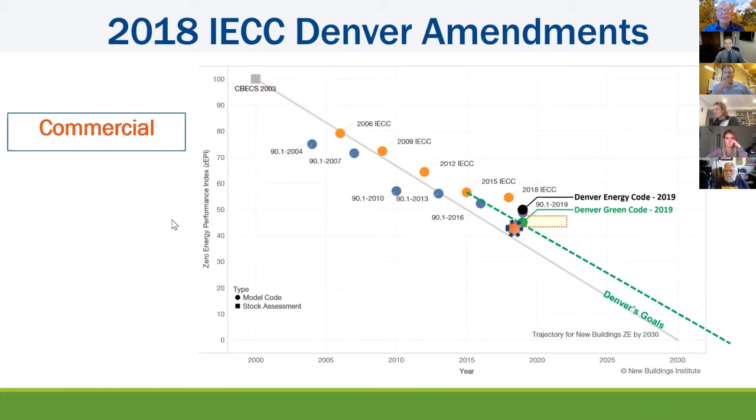That's really exciting. Here's a quick chart showing how Denver, as an example, is using the building code to drive improvement in carbon reductions. This green dashed line is the important one—it shows that following Denver's building codes will result in the building sector having zero emissions by 2035. That's actually pretty ambitious. Some people would like to see it happen even faster, but the reality is that getting to zero by 2035 is a pretty aggressive challenge for architects and building designers, and we're excited to embrace it.

In addition to the AIA, you've probably heard of other organizations involved in building decarbonization. The U.S. Green Building Council and their LEED program is one especially well-known example. As architects, we're happy to deal with these and embrace many even more stringent standards out there. We'll be showing you a few buildings that deal with those.

I wanted to share one example of a project underway in our office right now—a bond-funded project down in the San Luis Valley at the Sierra Grande School District. I wanted to share it because it's our first large building, 90,000 square feet, that is 100% electric. There's no natural gas in this building—not in the science labs, not even in the cooking kitchen. We wanted to show it's very possible to electrify not just residential buildings, but large institutional buildings as well.

There's one other organization I wanted to tell you about today, called Architecture 2030. It's parallel to the AIA and has adopted a standard of lowering carbon emissions of new buildings by another 10% every half decade. We've been working with this program for 15 years, and we've already reached the goal of reducing carbon emissions from our new buildings by 80%, which is pretty aggressive. In 2025 we need to move that to 90%, and as this graphic shows, by 2030—our target year as a profession—we hope to be carbon neutral with all new buildings.

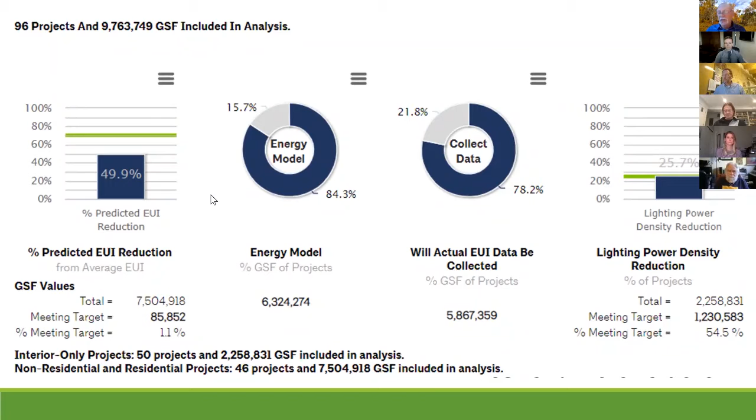Many of us member firms in the AIA rigorously track and report the results of all our buildings relative to the standard. I want to highlight this block chart on the far left of your screen: that 49.9% represents our total building portfolio last year, in 2019, so you can see we'd made pretty good progress. The goal last year was 70%, so we were just a nose under 50%. Every year we track and record this data and measure our progress, as do hundreds of other member AIA firms—because if you don't measure something, how are you going to make progress?

In addition to measuring what happens with the design of our buildings, at Cuningham Group we're very serious about walking the talk with our own operations. So we rigorously track in all of our 6 US offices and 2 overseas offices the carbon emissions and basically calculate our own corporate carbon footprint.

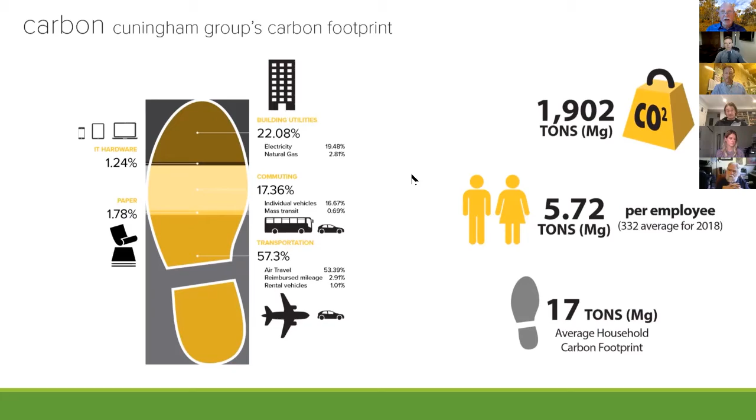This is a graphic that illustrates that footprint for you. The big takeaway is that right now, per employee per year, we're right around 5.7 tons of total greenhouse gas emissions. Now that we know this, we have put in place a plan to offset 100% of those emissions by the year 2022. We're finding that more and more of our clients are very interested in knowing what we're doing about our carbon footprint.

So if we were live today and gathered together in person, I would ask you this as a quiz. I'd like you to tell me which of these 3 sectors in our economy, transportation, buildings, or industry, do you think is most responsible for greenhouse gas emissions? Which would it be? Since we're not live, I can't quite do the quiz, but usually I get people thinking either transportation or industry.

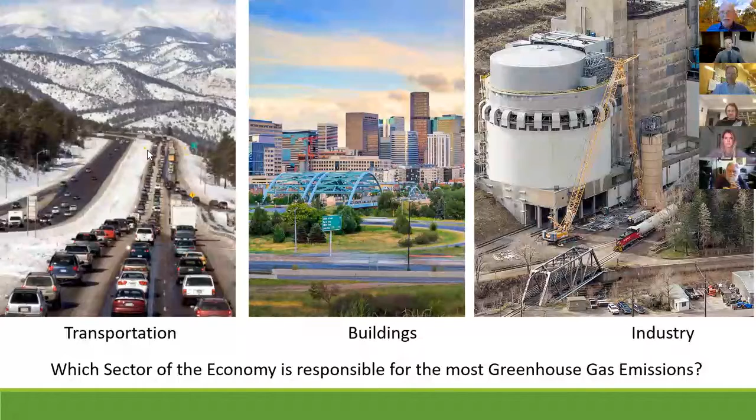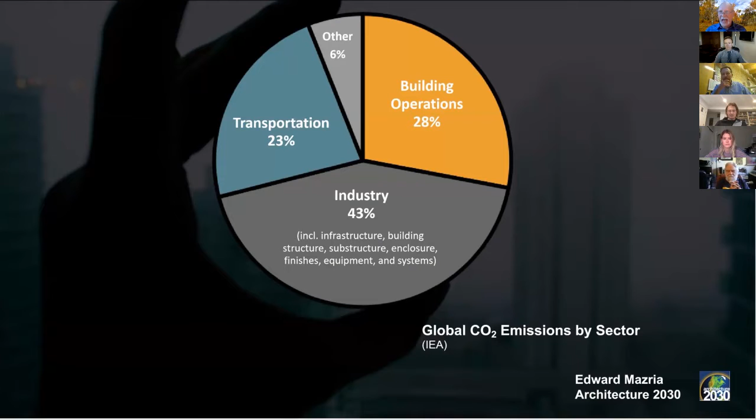And the answer is right here. The transportation and building operations are very close to one another. They're just about neck and neck, right around a quarter of that total pie. Industry is the single biggest chunk at nearly half. But there's one more piece of this that we need to understand and dig a little bit deeper. What we find when we take apart that big section of industry is that a very significant portion of it is actually all the materials that go into our buildings.

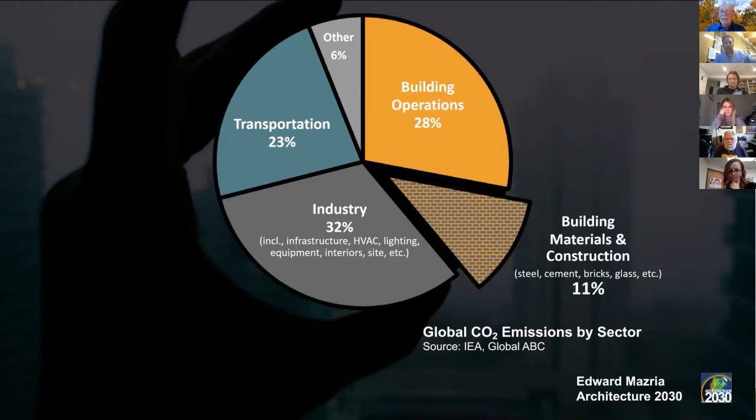So when we add all the greenhouse gas emissions from operating our buildings to the greenhouse gas emissions that are due to all the materials that we generate to create the built environment, we find that the combination of those is a full 39% of total global as well as US greenhouse gas emissions. So the big takeaway here is that buildings do make a very big difference. How we design and construct them is a very important piece of solving the carbon problem.

Existing building operations, though, remain a very significant problem because we have such an enormous building stock already in place. And we need to put in place better measures to start to tackle the problem of how do we more rapidly decarbonize the emissions coming from our large stock of existing buildings.

But if we think about that issue of those materials, there are some specific things that we can start to do better as a profession and as an economy and a society. The 3 big keys, and the first of those is simply to reuse, to use our resources more effectively. So where we have existing buildings, let's try and find ways to adaptively reuse them and find ways for them to continue into use longer into the future instead of simply demolishing things.

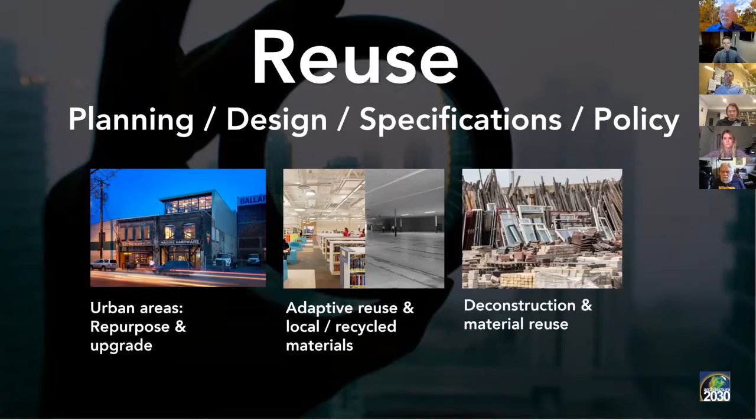We can also find ways to be more creative in how we utilize our urban areas and revitalize them. And finally, when it is time to take apart a building, instead of all that material going to landfill, let's try to use more of it again and repurpose it in future buildings.

The next piece is to reduce. As we're starting to design buildings now, we work with our structural engineers, for example. In fact, we have a structural engineer on this call, I noticed, Bob Redwine, welcome. So we're talking a lot right now about structure optimization. If we're enclosing a certain amount of square feet, how do we do that with less steel, with less concrete?

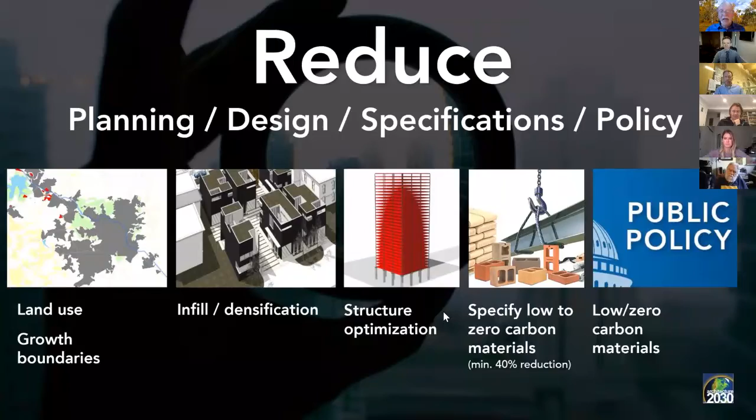Other things that we want to talk about are how do we specify materials that actually use less carbon to make them? And that's a very big push for many municipalities right now. And finally, how can we design buildings and environments that sequester carbon, that actively remove carbon from the environment?

Using more wood is one key answer to that. You'll see some projects that do that in just a little bit. We're also challenging our landscape designers to show us ways to design sites that start to sequester more carbon than they release.

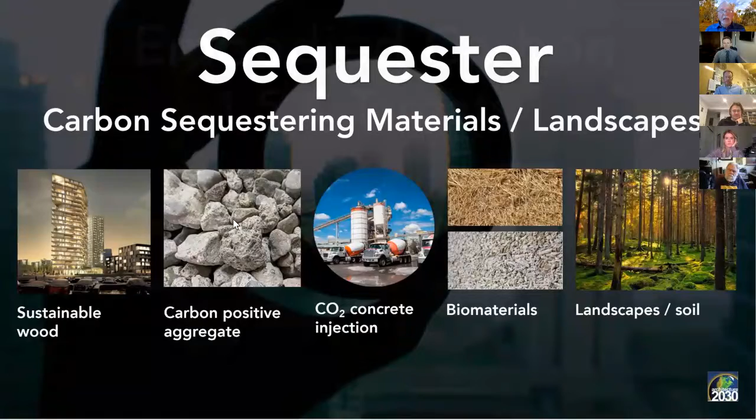And in fact, we have established targets, just as we had targets for reducing operational carbon in buildings. We now have targets. Right now, we're saying we think we can reduce the embodied carbon going into all these materials by 40%. And by the year 2040, that's our goal for when we will have zero emissions in the materials sector.

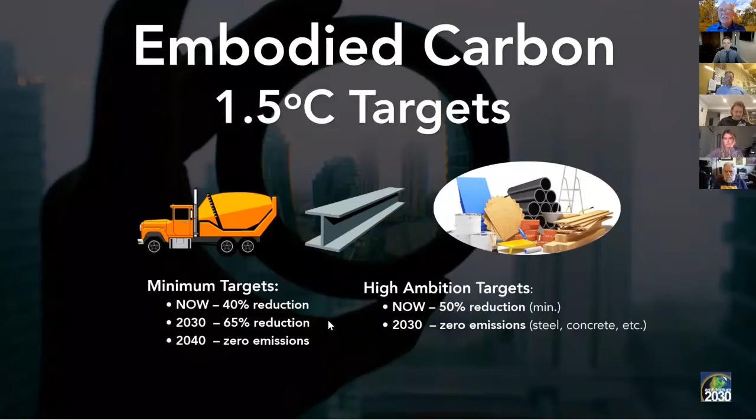I just wanted to share with you our excitement about a bill that came before the Senate just this year, and we believe it will come back again next year. That was a bill that proposed that all state-funded projects in the state of Colorado would establish criteria for understanding and limiting the amount of embodied carbon that could be used in the materials that go into those projects. And that applied specifically to cement, concrete, steel rebar, glass, and certain kinds of insulation. So we are very happy to be part of sponsoring that bill and testifying at the Senate, and look forward to more such collaborations with many of you in the next year or two.

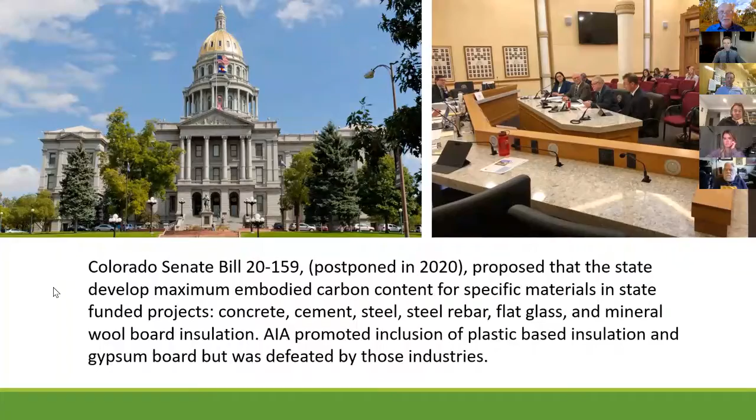With that, I'm going to turn it over, I believe, to Kevin. Is that right? Yep, you bet. Okay, thanks, stop Paul. It was nice to get through that without any of those very strange and rude interruptions, wasn't it? You took the harder part of it, Paul. Thank you, that was good of you.

So, Kevin, before you start, we're trying to get two of our legislator guests back in the room. Trying to make sure we can get Representative Bird and Kraft Tharp back in. I've got the waiting room enabled, so I just have to wait for them to reattempt. And while we pause for a second, I really apologize to everyone. That is the first time all year that I've been involved in such an effort to crash a Zoom meeting. It was everything they said it would be. It was, and then some, yeah. I'm glad I didn't have too many screen captures from that. This one's going to be fun to edit after the fact. Yeah, good luck with that.

All right, Jerry said they were locked out, but I thought I was able to get them back in. So, all right, I am going to allow people to unmute themselves, and then I will quickly clamp down if any of those previous attendees are still in the room. All right, people can unmute now. Great, I will point out, I think Kevin, you are duplicated on my screen, so it's possible that there could be another bug there. Oh, okay. Yeah, I'm presenting on one device and advancing on another one, so that's legit. Okay, yeah, thank you, appreciate that. This did happen to my kids at their first day of school, so now I feel very cool and hip, like I'm like them now, you know.

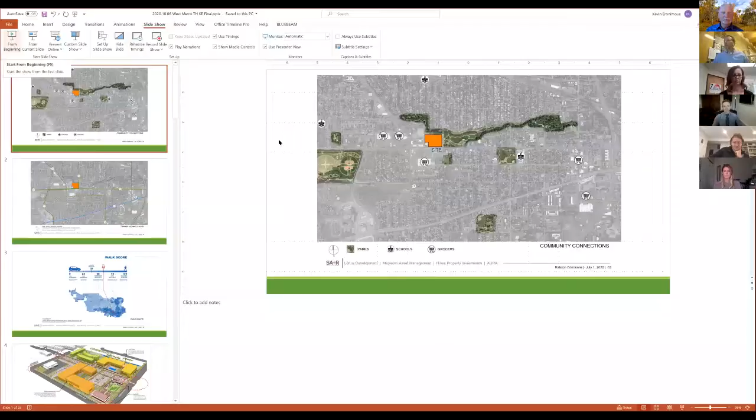Lucking, who's on the line from Fentress Architects, because I'm actually stunt doubling on her slides today. So the previous iterations of this presentation had a start with DIA, but we're going to start with something a little closer to home for this group, and piggyback a little bit on what Paul was talking about with some notions of both infrastructure and reuse and the carbon that goes into the built environment. So a lot of the work we all do is looking at new buildings and how they affect the built environment.

Looking at reuse of existing infrastructure and facilities is also a really important tool towards reducing carbon infrastructure. So we're going to look at a site at Ralston and Garrison today, flip through a few slides on this project and describe beyond the building aspect, what the community-wide aspect can do for not only carbon sequestration and reduction use in buildings, but also community connectivity and kind of health and well-being in that environment.

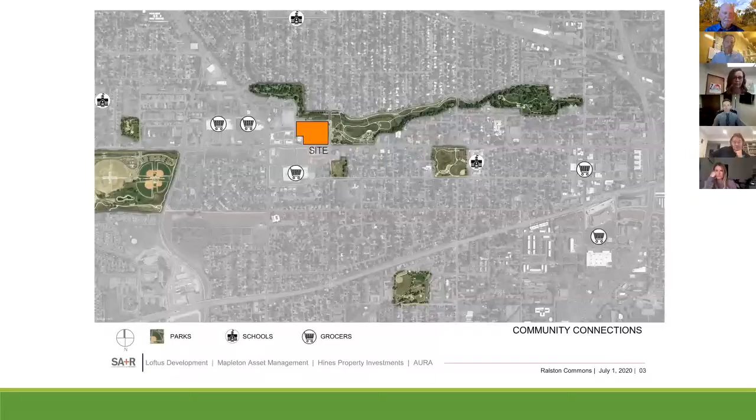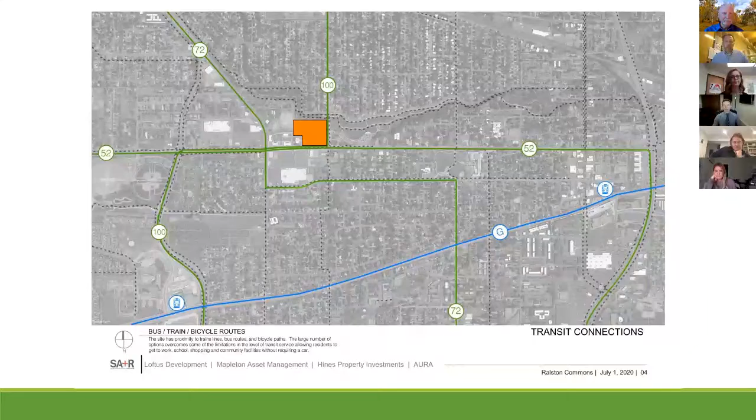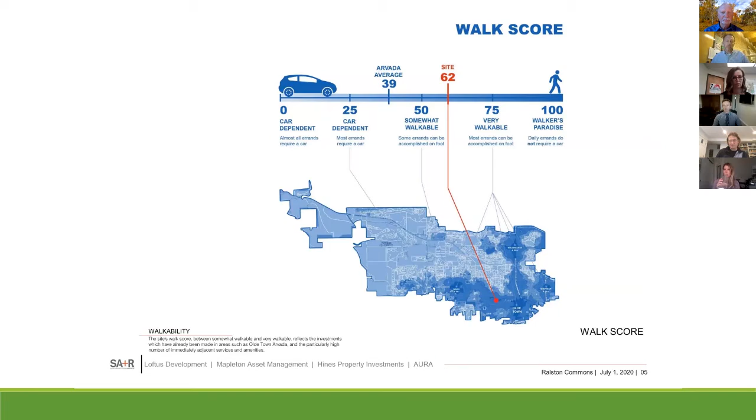Taking advantage of elements like that can improve a component called walk score - the ability to get around without relying on single occupant vehicles. This is its current walk score for the site, and I think what we're hoping is that through the master planning efforts of this site, that score improves.

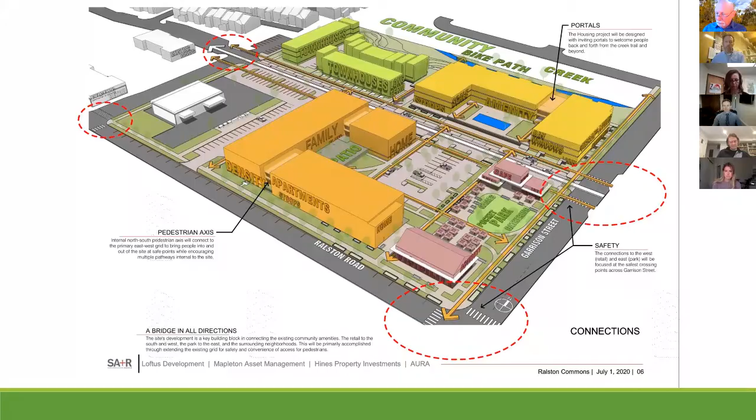This goes through and looks at connectivity, some different strategies for walkability. If you can't have good sidewalks, the connectivity from a park nearby, no matter how good it is, falls apart. So this project's early work has actually been going for nearly 17 years now, since the first efforts to look at this project and clean up the site.

We did a really unique town hall meeting recently outdoors in a park to respect social distancing, where we had about 20 easels set up and a video that kind of gives the history of this site.

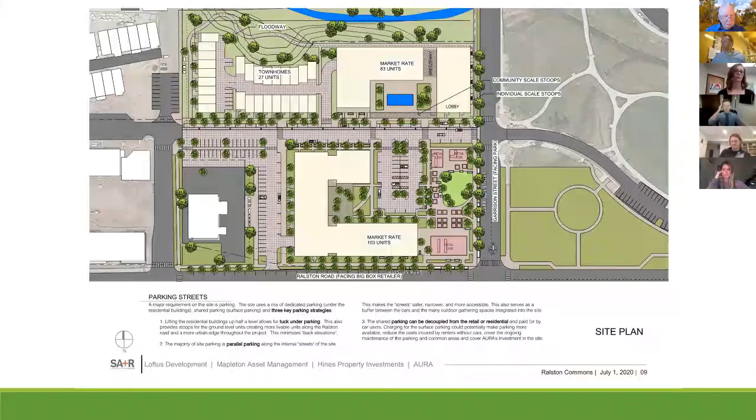So how does this relate to decarbonizing the built environment? Well, for one, as I've mentioned, it looks at measuring carbon in new infrastructure, and rather than building new infrastructure, this looks at relying on existing and potentially better utilizing that infrastructure for a more diverse variety of uses and occupants.

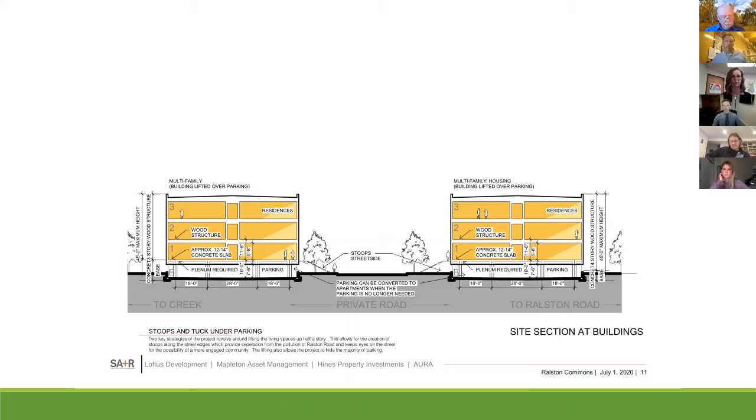One of the strategies on that is still not making the cars so prominent. So what you see on the screen here is a strategy to engage the parking slightly into the grade, lift the residences, but then also create some stoops on the street side, which in more dense urban environments are often a place where people congregate. So you see a little bit of envisioning of placemaking as part of this strategy.

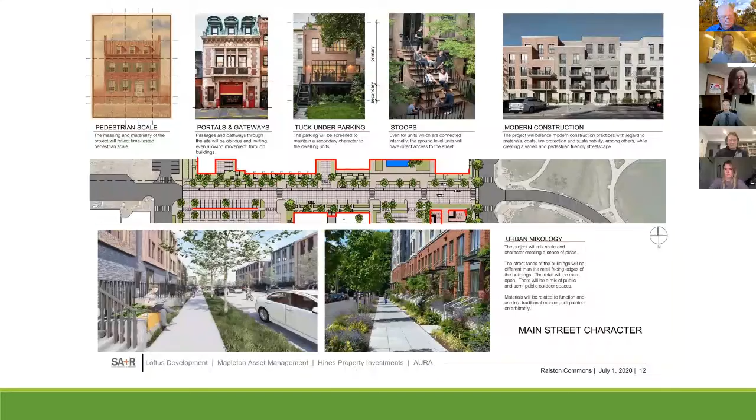One of the comments we hear often about sustainability is you can have the most sustainable, the most energy efficient building or community, but if it's not beautiful and people don't love it, then it's not really sustainable. It's doing a little bit better, but it's not making it a place that people love and care for and want to be in. So that gives you a quick idea of some of the ideas close to your community of reconsidering some old infrastructure.

And I'll go now into a portion of the slides that our colleague Deborah put together to just discuss a little bit of the difference between embodied carbon and operational carbon.

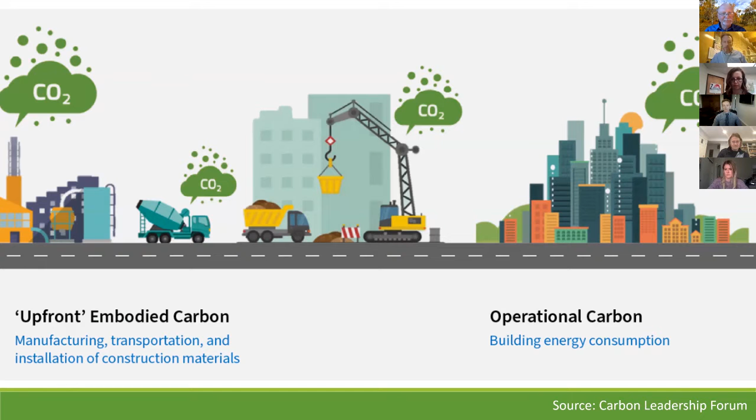And bake that bread. And that, of course, relates to the building. We'll turn to some slides for that in a moment.

How does that affect people? That goes a little bit to the planning diagram that we looked at - public health and productivity, connectivity to their neighbors, being able to walk, visit, learn who your neighbors are. Those are all important parts of the social costs of a triple bottom line prospect. And then, of course, the ecology side of it, the environment, what's the ecological footprint of these buildings.

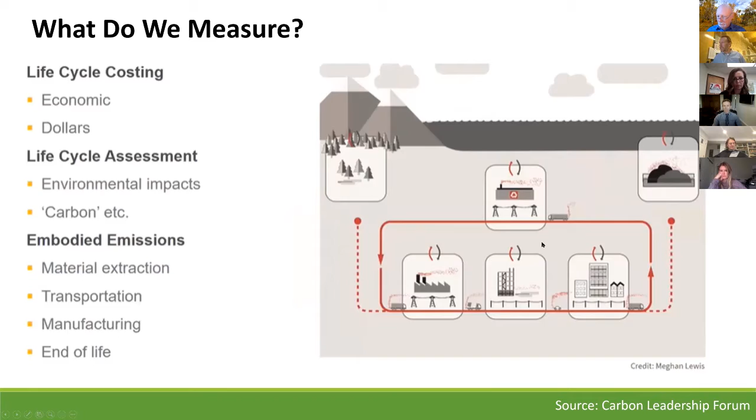And of course, looking at the entire cycle of what goes into a product, it's not just building a building, but it's what material is extracted to produce the materials that ultimately become part of your building. And how easy or difficult is it to get those materials to a site? How easy or difficult is it to get them out of the ground? And then to transfer them into something that we're using in the built environment.

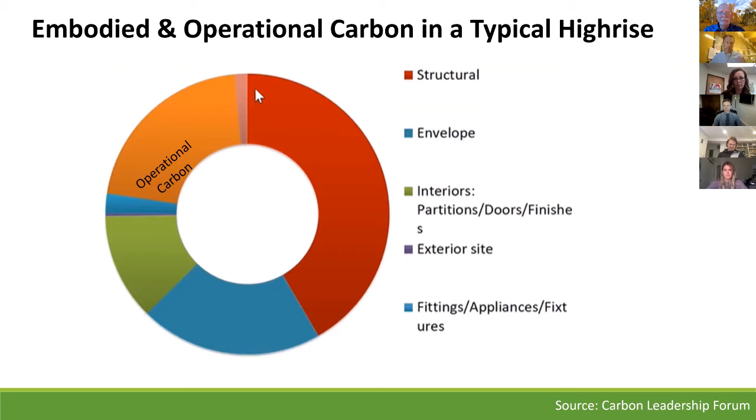Brandon will show us some examples of a wood building type that we're seeing more of, that's a little more mindful of this component of it. And then, of course, what happens at the end of life with these buildings, because if you're building something that can only be demolished by tearing it down, imploding it, whatever the case may be, considering what happens to those materials when you get to the end of a life cycle of a building is important as well.

So we talked before about transparency. We're seeing more and more interest in what's in materials. So much like the nutritional labels that you would see in that bag of flour, you see now that architects have available to them or can insist from manufacturers that we know what is in the products that we're specifying to go into a built building environment.

So on the product side of it, that might be, what are the emissions from that? Are there any chemicals that are hazardous to human health as part of the manufacture? Are there any animal testing in the testing of the material and the development of it? And then also the embodied carbon transparency of it.

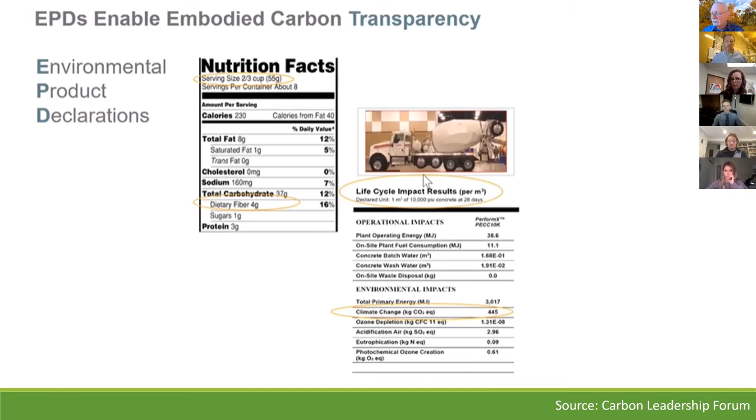So we're seeing a shift in the industry as more developers, clients are aware of this. It's a question that's being asked, so that transparency is leading to transformation.

And we've looked in previous presentations just at what does that look like? What's the embodied carbon cost difference between concrete or steel?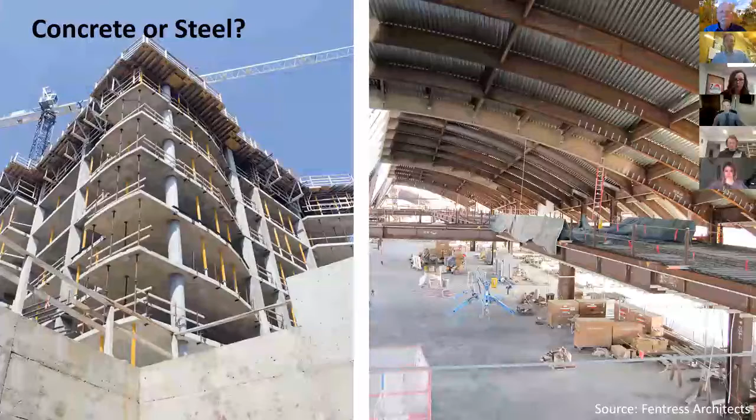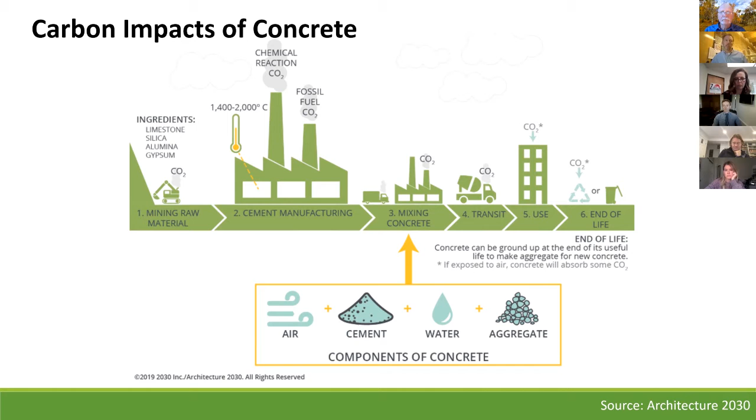If we look through the concrete, it's a very intensive process to create and pour and deliver concrete, from the mining to the firing, really cement manufacturing, when you make the cement itself, the thing that holds everything together, mixing, delivering it to the site, how it's used, and then what happens to it at the end. Concrete typically is a great long-lasting building material in terms of the life cycle cost of the building. What happens to it at the end is a little more challenging because when it reaches the end of its useful life, the dismantling and reuse of it is so cost prohibitive that it can't really be effectively done. Steel can look a little better in some regards because at the end of its life, it may be able to be reused.

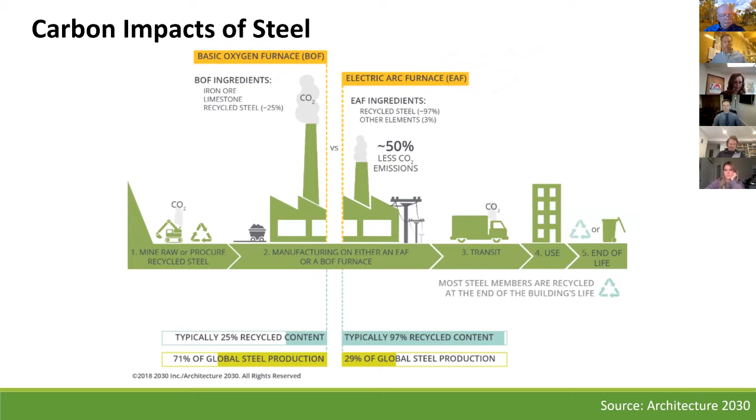But again, you do have extraction, you have the firing of ore, you have what goes together to extrude the shapes, and then, of course, a similar component of getting it to a site. When Brandon talks about cross-laminated timber building, that's another example of structure consideration - maybe it's working its way the other way of using materials a little bit more intelligently.

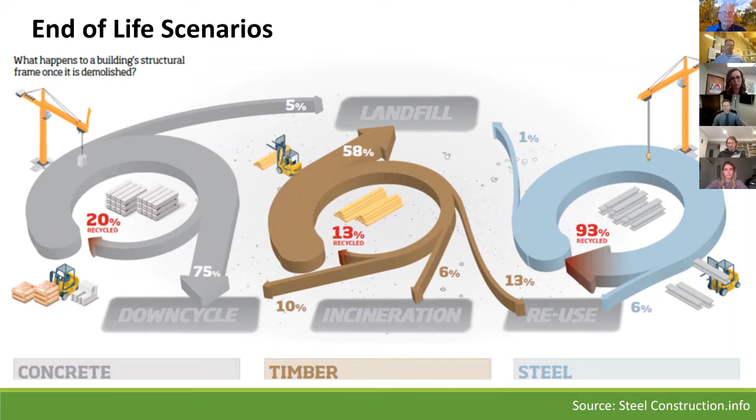So this takes a little closer look at what happens to materials, how much of those can actually be reused again. Concrete can be recycled and crushed and reconstituted into more concrete. Lumber and timber, of course, have some possibility of being recycled. In a light stick framed building, that's less likely than it is like the ceiling above me here, where it's heavy timber construction, and that material can be reused in larger chunks. And it's where steel really starts to look pretty good because it can be recycled again, and a lot of it can be saved from a waste stream going into a landfill.

So as we look through some of those components, Paul mentioned a little bit about the living building, or the different metrics that we use, such as LEED. We wanted to highlight another metric that looks a little bit beyond LEED and addresses carbon in a more thoughtful way, and it goes beyond the energy. A lot of energy calculation, use, and consideration gets pretty engineering. And one of the things that this group, the Living Future Institute, came up with about 15 years ago now is...

What does it look like if we look beyond making buildings less bad? What does it look like if we really consider buildings as a regenerative component of their environments rather than an extractive component of their environments? So they set this very high bar of a certification method called the Living Building Challenge.

And there are 20 imperatives, as they call them, that deal with everything from place, agriculture, habitat, of course, water, energy, and light. But it reaches a little bit farther, and it looks to health, well-being, happiness, beauty. And that is where the science and the engineering part of it really starts to blend with the beauty and the aesthetic part of it that most architects aspire to.

And what you see here is a grid to a full Living Building Challenge certification on the right-hand side, and some alternate certifications on the way. I think Brandon will show a few of those when we close out.

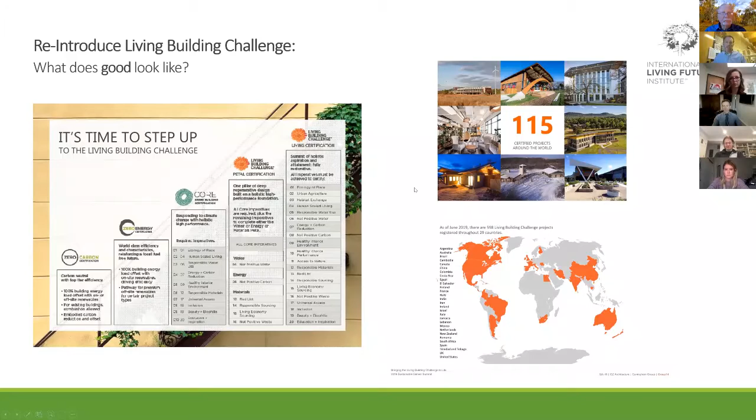This isn't pie in the sky idea. These are real buildings. This really happens. They're in and around not just the world, but also in Colorado.

So with that, I'm going to turn it over to Brandon for some happier news, actually, here in Colorado. All right.

Well, I will be very brief, just so that we can allow for some time here at the end for questions. I'm Brandon Gossard. I'm an associate and project architect with Anderson Hallas Architects. And I was charged to start curating different local examples here in Colorado that start to show kind of how we can start moving in this direction.

So what I'll do is I will start sharing my screen and we'll dive into it.

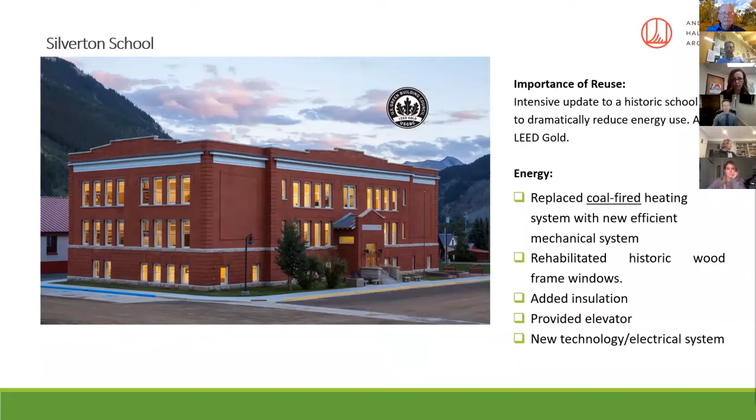Now moving into our backyard, the Cesar Chavez building, this is in downtown Denver. This was an existing high rise. If you remember the chart that Kevin had, where actually more than a third of the total embodied carbon was in the structure, this was a building where they kept working in it while they were reskinning it. They were able to extensively retrofit the structure and reduce the amount of energy use by almost a third.

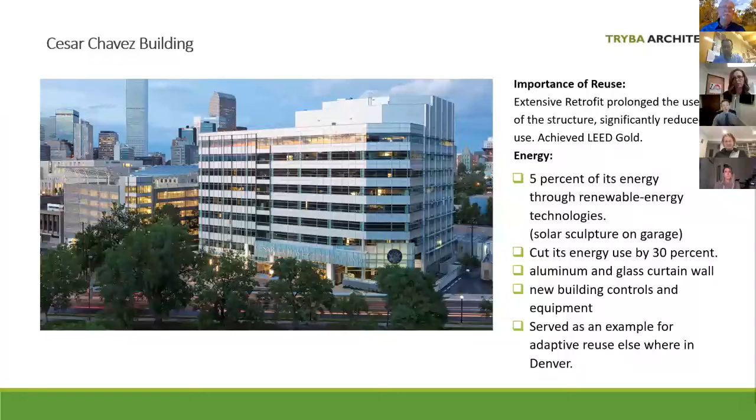Not only that, it served as an example to other projects that this is something that is not only possible and viable in an active building, but it's a good path forward. In fact, when the city of Denver was considering their new police station 6, they had a whole different site in mind, and they ended up moving it downtown to where they have the pre-arraignment detention facility, to make reuse of that building and the embodied carbon that is in place there. So it's just an example where one project can catalyze and inform future projects.

This is one that Kevin is going to be very familiar with.

This is the DU Burwell Center for Career Achievement. I love this building because it is that mass timber construction. It really looks at how can we look at timber and wood as structure versus concrete and steel.

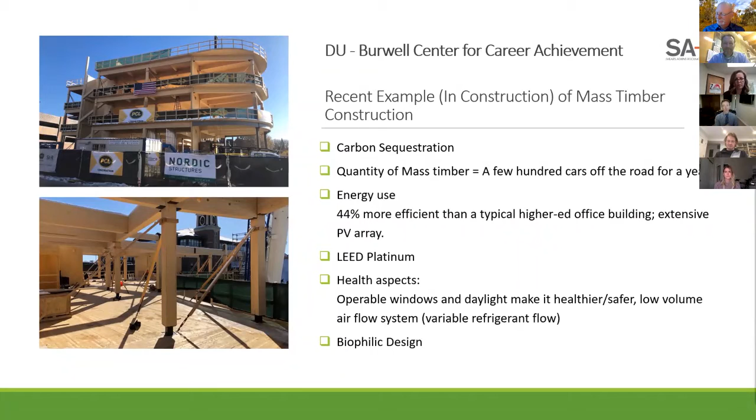The fact that it's 44% more energy efficient, the fact that it's LEED platinum. There's a lot about this building and the way that the wood is used as the primary structure that looks to start to tip the scales towards sequestering carbon versus just producing a little amount of it. And I think Kevin's comment on this, and he could certainly speak at much more greater length and detail, is that really it's using trees for what trees do best, and that's sequestering carbon and making our lives better.

Still looking at Denver. In this instance, I'll keep it a little bit brief, but this is really looking at how we can create and integrate demonstrations in everything that we do. So in this instance, the idea of educational demonstrations of net zero energy, really trying to showcase wherever we have a public space, different ways of managing our limited resources.

Because one of the unique positions that the public sector is in is the cost benefit question, it takes place over a much longer period of time. A private developer might look at the next 5 years, the next 10 years, but cities and states, they look at the next 50, the next 100 years. And ultimately those stakeholders and shareholders, they will keep reaping benefits either through just more programs, because the operational costs will come down, or the lower taxes, depending on how their community decides to prioritize things.

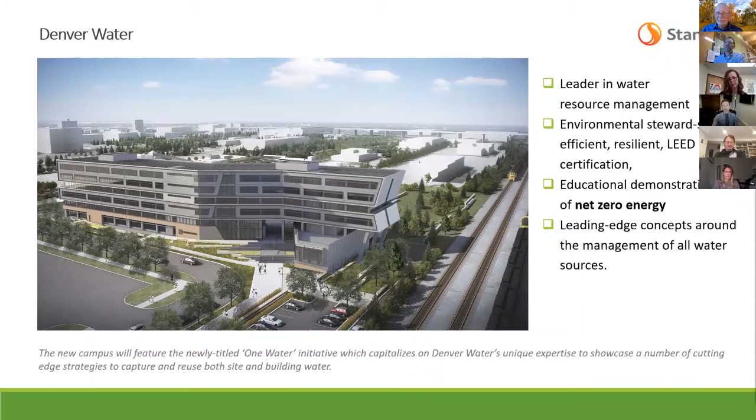And it really is the way that these programs can catalyze improvements. So right here we're talking about electrification, and so that is trying to position buildings to where they can take advantage of grid electricity, which as we shift more and more to renewables will become ever more and more green.

And actually these three examples, the one on the right, you can see this is the one that Paul brought up with the Sierra Grande, a brand new building. The one on the left, it was originally constructed in 1930, the Fort Lupton School, and much earlier in one of its iterations of expansion, Paul was actually able to work on this building. And with the BEST grants more recently, we were able to then update it and push it that much further and really look at how can we remove fossil fuels from the operation of these buildings.

The one on the left and the one in the middle rely on a ground source heat pump, and that is something that can be run just on electricity. The one in the middle, the Custer County School, used photovoltaics so that it helps to offset basically their peak billing with the local electricity provider. So it dramatically reduced their total billing to be able to operate this school.

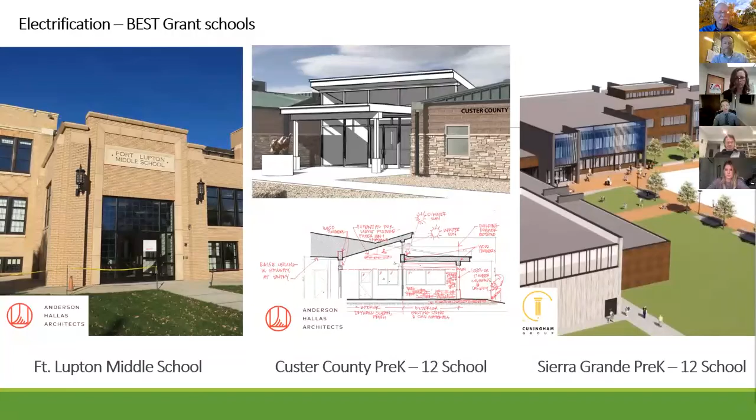That's part of when we find these tools, the ground source heat pumps, building integrated photovoltaics, it makes these type of design decisions not only possible, but very, very realistic, because these are all funded in more rural areas where every dollar counts, and they really have to be mindful about where those investments occur.